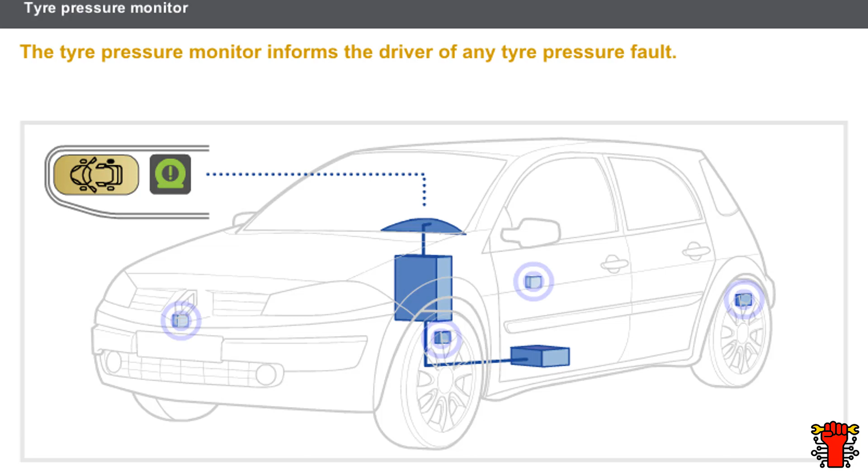The tyre pressure monitor consists of the following components: tyre pressure sensors, a receiver, a computer, and a display.

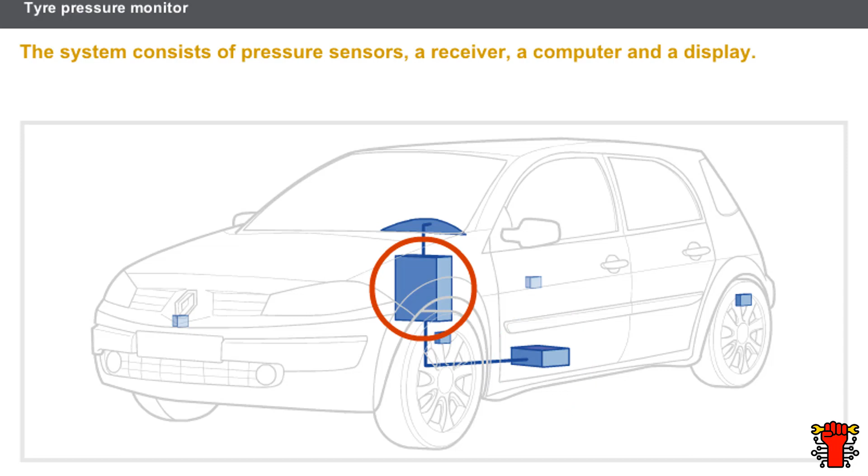The pressure sensor is contained in an instrumented valve. In addition to the pressure sensor, the instrumented valve contains an aerial and one or two other sensors. An acceleration sensor which determines whether the vehicle is moving or stationary. And depending on the model, a temperature sensor which allows correction of the pressure.

Each valve is assigned to a single wheel. The wheels must not be swapped to avoid producing false data. To prevent swapping, a coloured ring is used to identify the wheel rim on which the valve must be fitted.

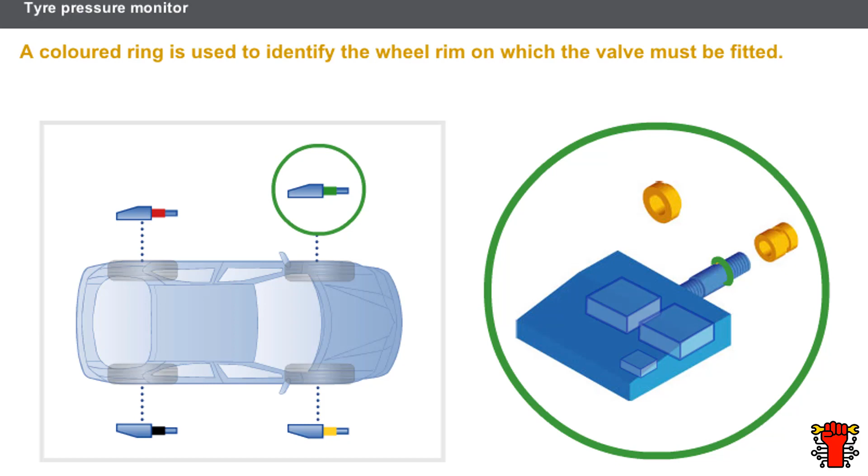Let's now see how the tyre pressure sensors work. The tyre pressure sensor functions in driving or standby mode. When the vehicle reaches a speed of about 20 km per hour, 12 miles per hour, the sensor is in driving mode. In driving mode, the pressure is detected and the data are transmitted regularly. When the vehicle is stationary or moving at less than 12 miles per hour, 20 km per hour, the sensor is in standby mode. In standby mode, the pressure is detected, but the data are transmitted only when there is a significant change.

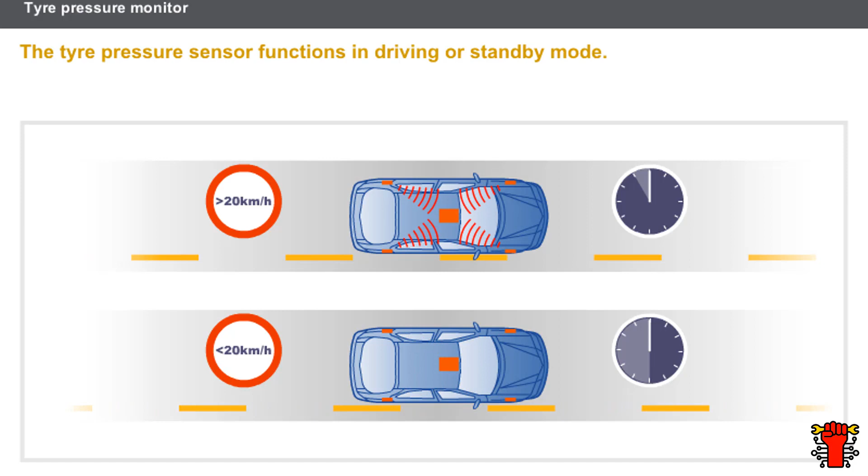Let's look in more detail at the receiver. The receiver consists of a receiving aerial and a computer. The receiver may be located under the vehicle or integrated in the computer. The data from the 4 pressure sensors is transmitted to the receiver. The receiver identifies each sensor and decodes the radio frequency signals. The tyre pressure data are then transmitted to the computer.

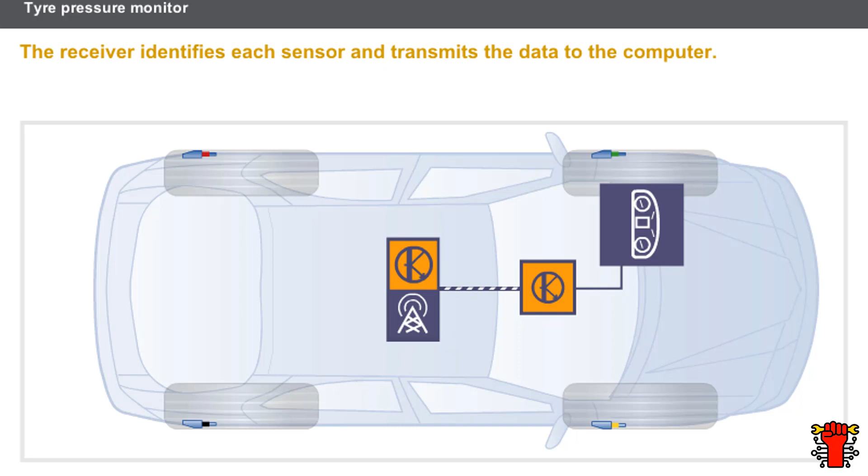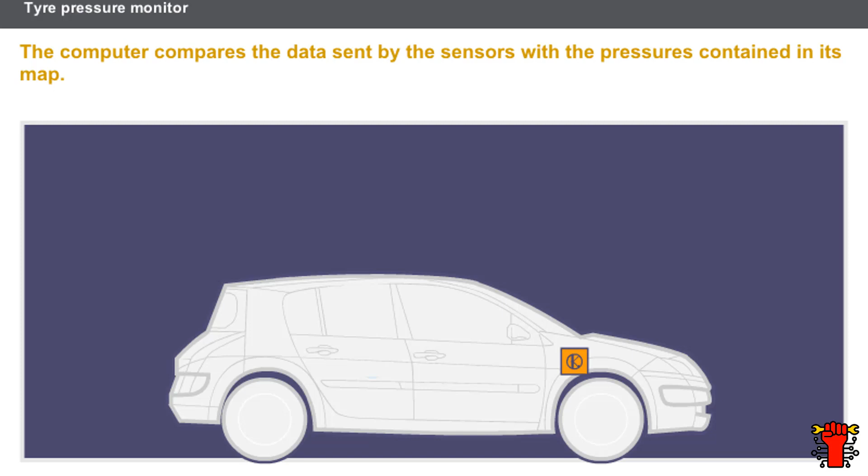The computer contains a map indicating the recommended tyre pressures and the alert thresholds for under and over inflation. The recommended pressures and the alert thresholds vary according to the vehicle and are modified according to the speed and load of the vehicle. On some vehicles, the computer also takes into account the tyre temperatures. The temperature and pressure of the tyres increase with speed. The computer compares the data sent by the sensors with the pressures contained in its map.

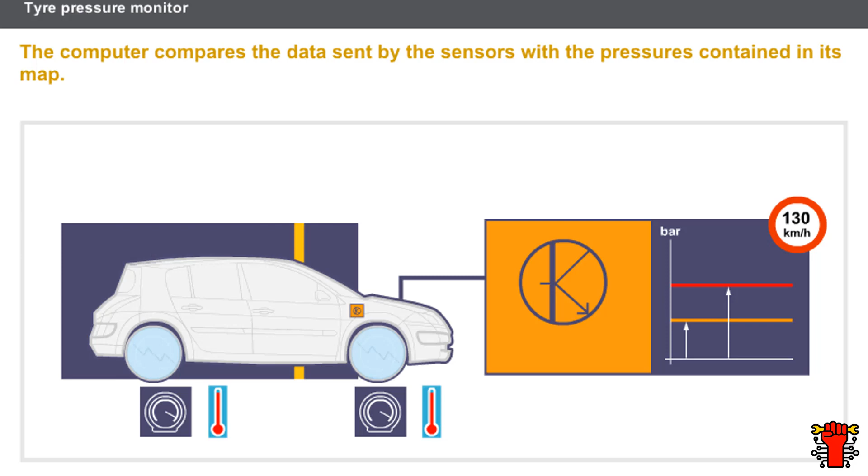Let's now see the operation of the whole tyre pressure monitor. First, the sensors detect the tyre pressures and transmit the data to the receiver through radio frequency signals. The receiver receives the radio frequency signals and sends the data to the computer. Then, the computer compares the data received with those contained in its map and determines which message to display. Finally, the computer transmits the message to the instrument panel.

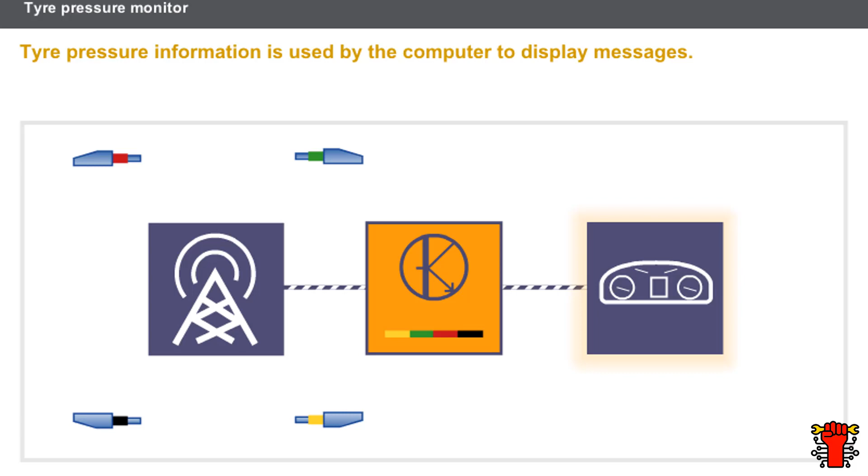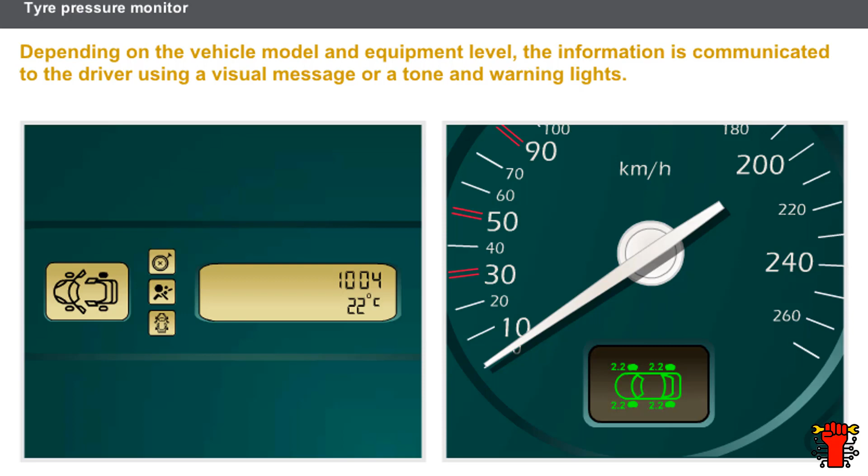The type of display and the appearance of the message sent to the driver vary depending on the vehicle model and level of equipment. For example, some displays give the exact pressure of each tyre. Other displays only indicate a fault on a tyre without giving the pressure. Depending on the equipment, the alert may be supplemented by a warning tone or a voice synthesis message.

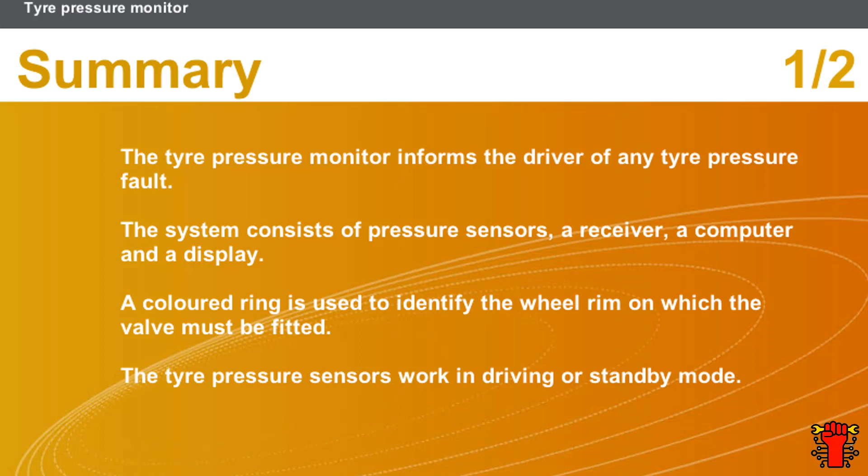In this section, we covered the following points. The tyre pressure monitor informs the driver of any tyre pressure fault. The system consists of pressure sensors, a computer, a receiver, and a display. A coloured ring is used to identify the wheel rim on which the valve must be fitted. The tyre pressure sensors work in driving or standby mode. The receiver identifies each sensor and transmits the data to the computer. The computer compares the data sent by the sensors with the pressures contained in its map. Tyre pressure information is used by the computer to display messages. Depending on the vehicle model and equipment level, the information is communicated to the driver using a visual message or a tone and warning lights.

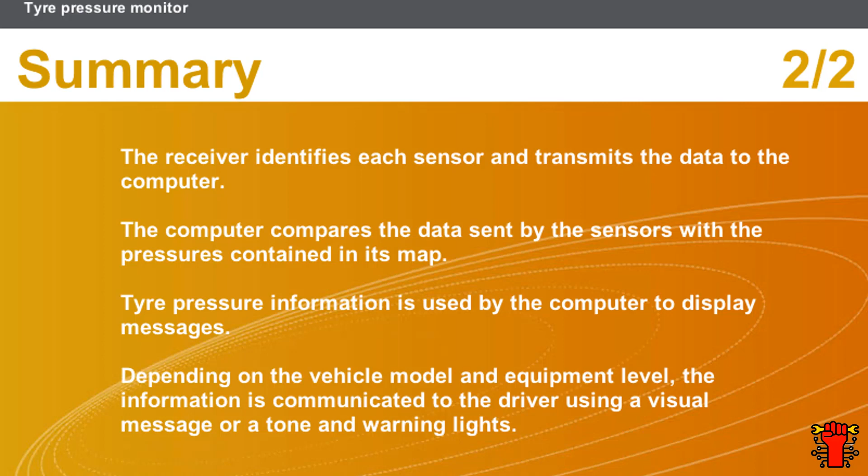Let's look in more detail at the various warning lights. On some vehicles, a color code indicates the level of seriousness of the fault. Green or white indicates that the pressure is within the tolerance. Orange is used for level 1 faults, indicating that a tyre is under or over-inflated. When the warning lights are orange, the service indicator light also comes on. Red is used for level 2 faults, indicating a serious pressure fault. When level 2 is reached, the stop warning light comes on, requiring the vehicle to stop as soon as traffic conditions permit.

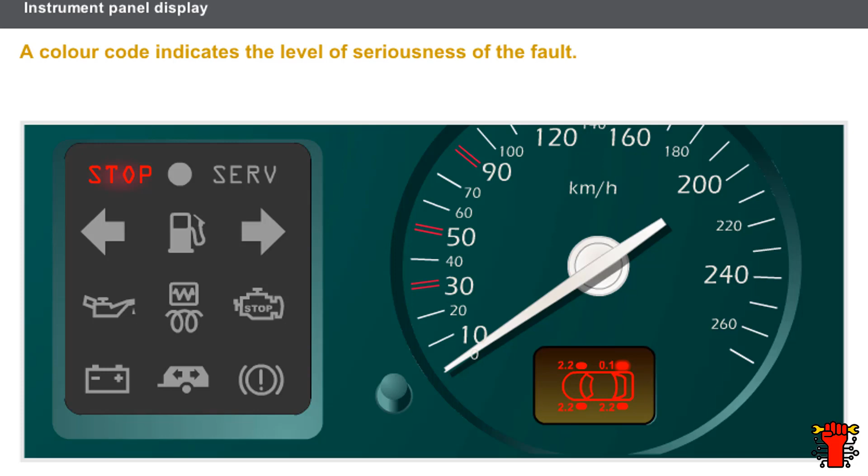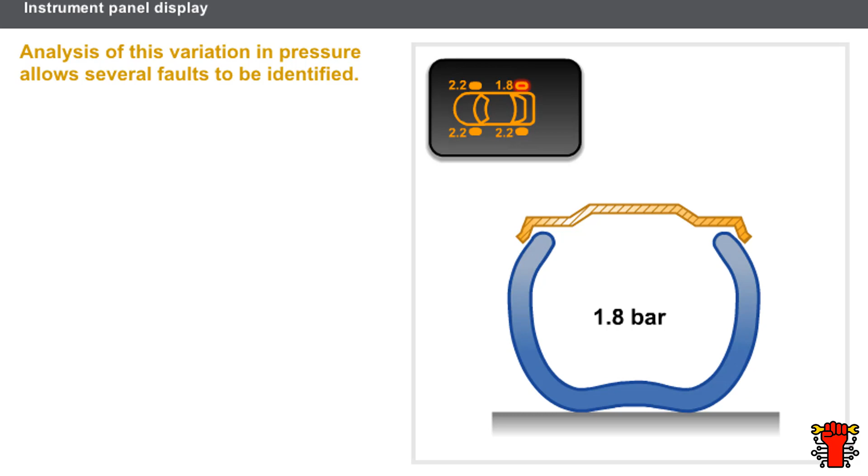Tyre pressures vary. This variation is detected and analysed by the tyre pressure monitor. Analysis of this variation allows the following faults to be identified. The tyre is underinflated. The tyre is overinflated. The tyre is flat. The tyre is punctured. And the tyre pressure is not suitable for the speed of the vehicle.

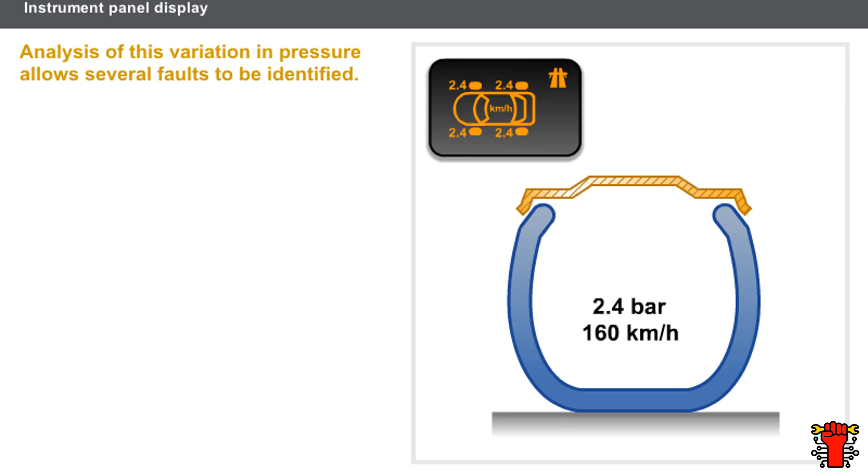The system also compares the pressures of tyres on the same axle. By doing this, the system can detect a pressure fault even if the values are within the recommended tolerances. When the pressure difference between the left and right tyres is greater than 500 millibars, the pressure fault warning light is displayed on the screen.

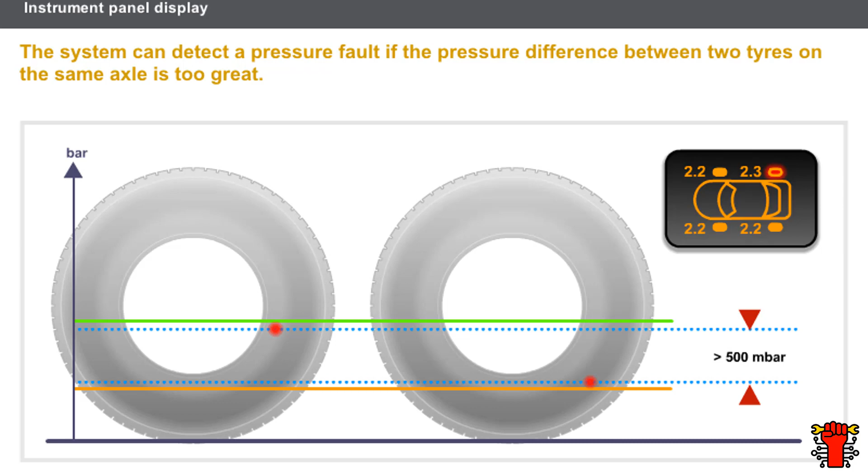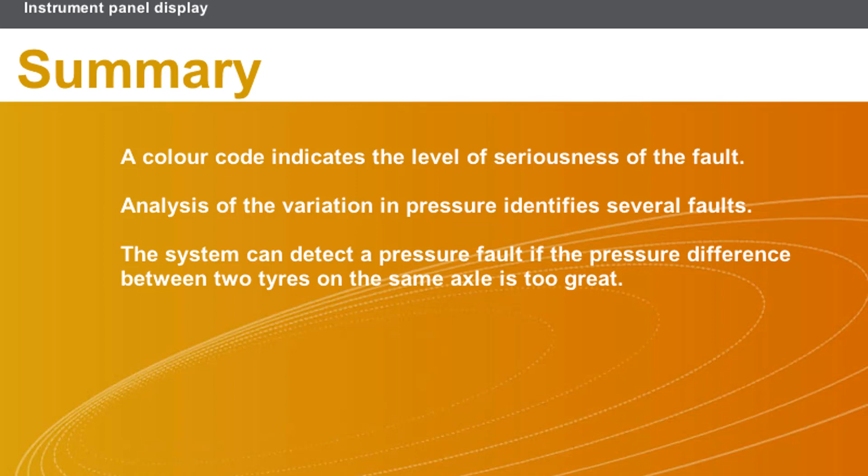In this section, we covered the following points. A color code indicates the level of seriousness of the fault. Analysis of the variation in pressure identifies several faults. The system can detect a pressure fault if the pressure difference between two tyres on the same axle is too great.